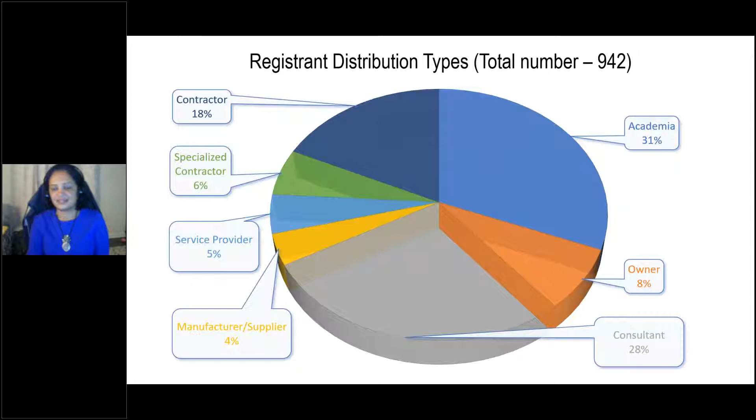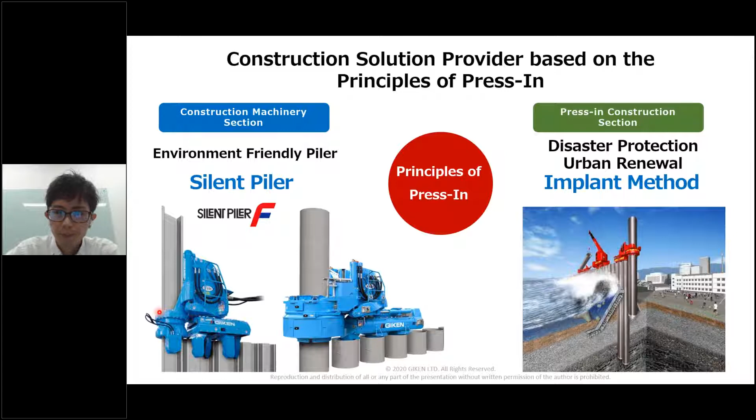Mr. Akio Kitamura, the founder of the company, was awarded the Ben Gerwick Award as the first Japanese recipient in 2017. The award was presented at IFCEE, an International Congress for Underground Development Technology, in 2017 in Florida, USA. It is an international prestigious award given by the Committee of Ocean Foundation in DFI for innovation, particularly in the ocean foundation industry.

We have several branch offices worldwide, such as in the Netherlands, Shanghai, Singapore, Sydney, and New York.

I will provide information on the principle of the press-in method and steel piling technologies. I will also present case studies that use the Silent Piler.

Mr. Ernst asked in the previous webinar if any of you have experience in steel piling or designing steel structures. Approximately 60% of you responded yes, which is good news for us. However, some of you might have never heard about Silent Piler or the name Giken.

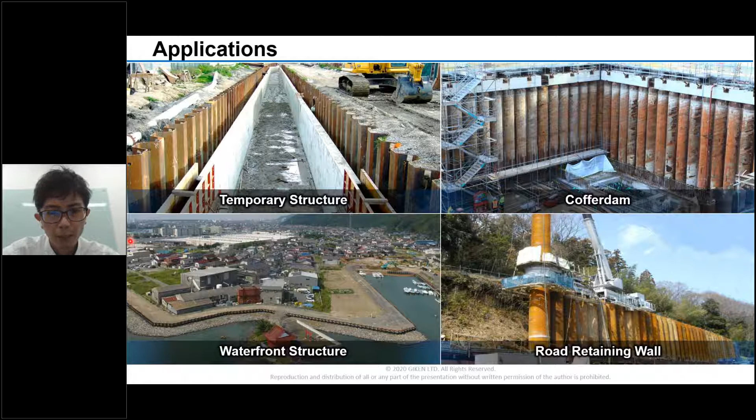Next, you will see the mechanism of the press-in method. The basis of the press-in method is very simple: Silent Piler grips the previously installed piles to obtain reaction force, which are called reaction piles. Based on the reaction piles, Silent Piler installs the sheet pile into the ground using static loading.

The sheet piles are not extracted easily because soil adheres to the sheet piles underground. From this fact, a pile driver can be integrated with the earth if the machine grips the previously driven piles. So this is a key point.

Also, it's possible to achieve extremely low noise and vibration piling if the pile can be pressed using the extraction resistance force of reaction piles.

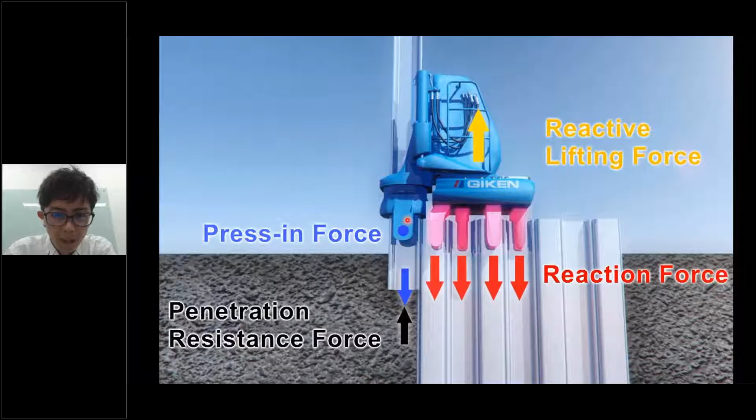The press-in method begins from a reaction stand, which includes outriggers loaded with counterweight. The counterweight provides initial reaction weight to install the first 3 to 5 piles into the ground.

After the initial piling is done, the counterweight and reaction stand are no longer necessary, so they are removed. But Silent Piler is able to continue the pressing work using only the already installed piles.

There are many types of sheet pile available worldwide, applicable for silent piling. For Z profile sheet pile, we can drive single Z profile and double Z sheet pile. We can also drive an 800 mm sheet pile, a wide range of Z profile sheet pile made by ArcelorMittal. In addition, hat-shaped sheet pile and zero-shaped sheet pile, both made by Japanese steel manufacturers, are available as well.

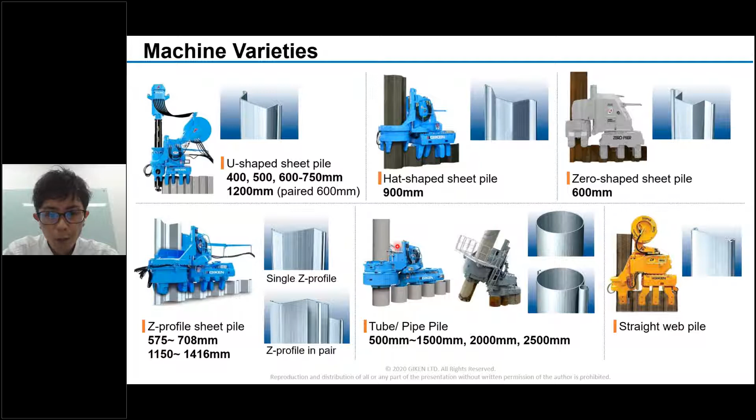Moreover, we provide tubular pile and pipe pile installation solutions. The diameters available are 500 to 1,500 millimeter, 2,000 millimeter, and 2,500 millimeter.

This shows the standard machine layout of the pressing operations. The operation comprises silent piler, a hydraulic jacking machine, power unit of silent piler as a power pack, and service crane. This picture shows what you should prepare on site as a standard.

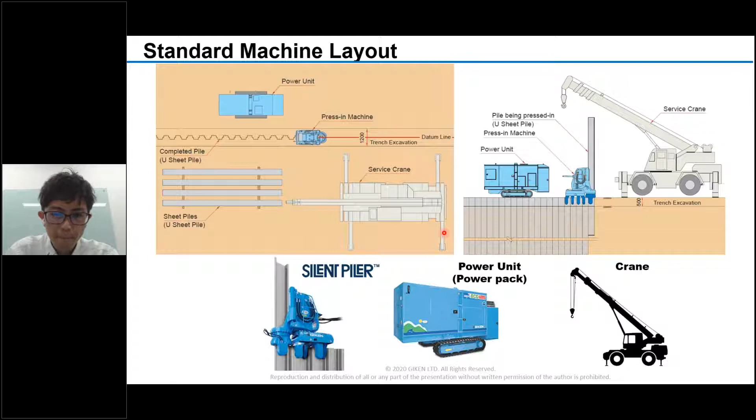The pressing method emits only minimum noise, and it is almost vibration-free. It's completely environmentally friendly. Hence, this pressing method is nuisance-free. It can be applied adjacent to residential areas and train operations.

For instance, in the UK, the acceptable noise level during construction is provided by British standard BS 5228. This figure illustrates noise levels of typical steel sheet piling methods. In urban areas, the acceptable noise level should not exceed 75 dB. In addition, the maximum noise limit in rural areas is 70 dB. As you can see, our method produces noise below the limit of British standard BS 5228.

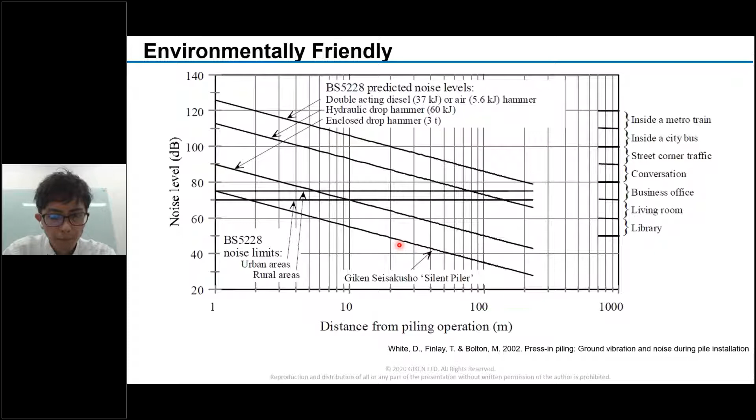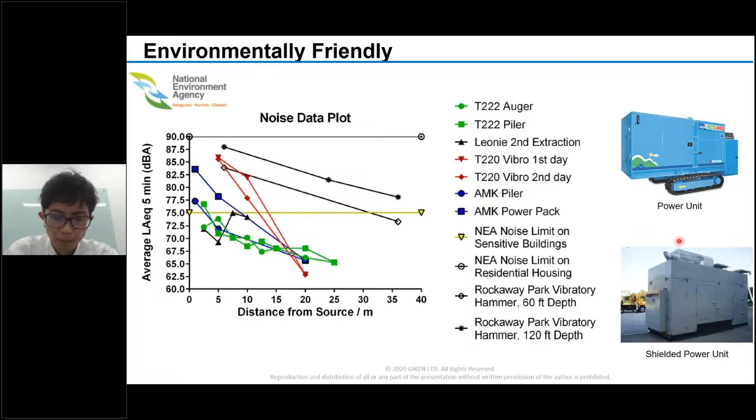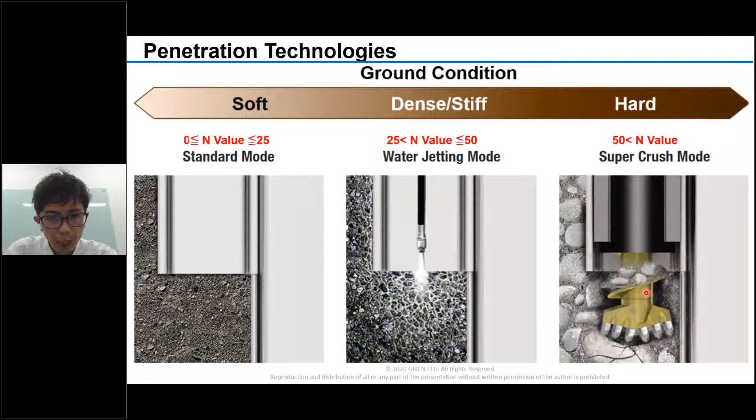As mentioned earlier, Silent Piler is available for many types of sheet piles. For single Z profile, the applicable width for Silent Piler is 575 to 708 millimeter. For double Z sheet pile, the applicable width for Silent Piler is 1,150 to 1,416 millimeter. When you consider Z profile sheet pile as a retaining wall, you don't need to consider any reduction factors.

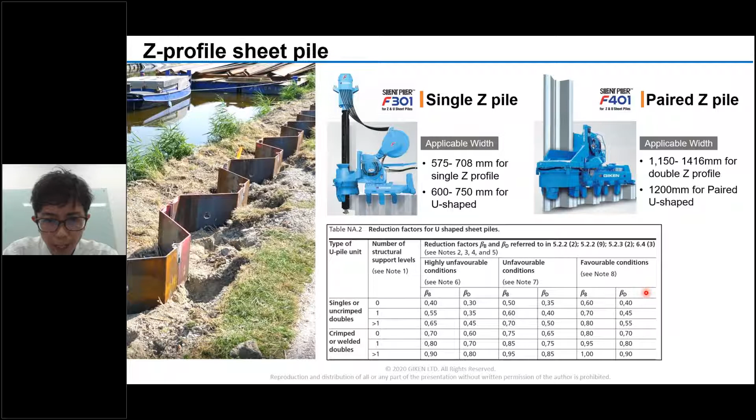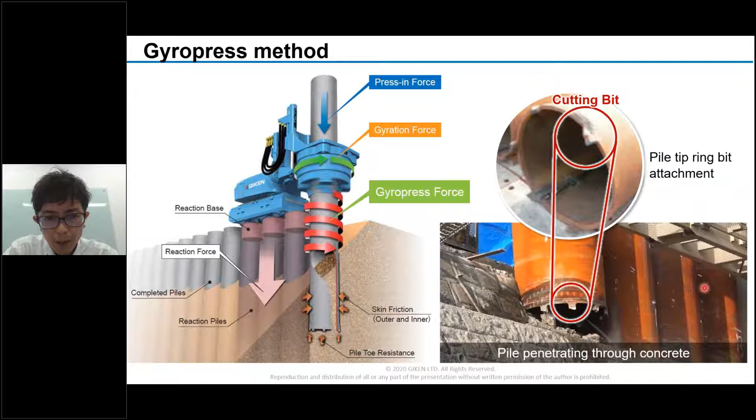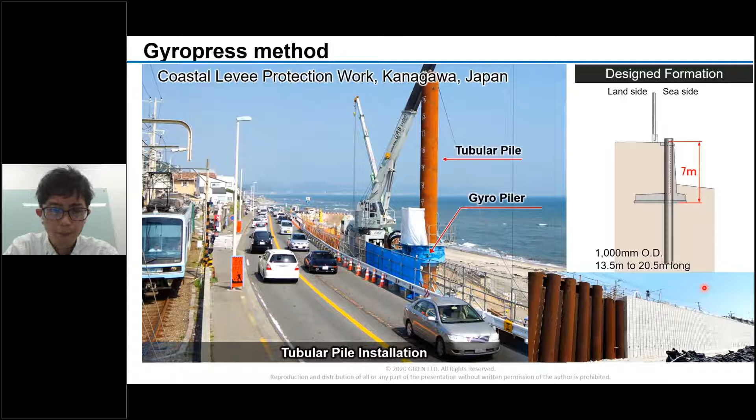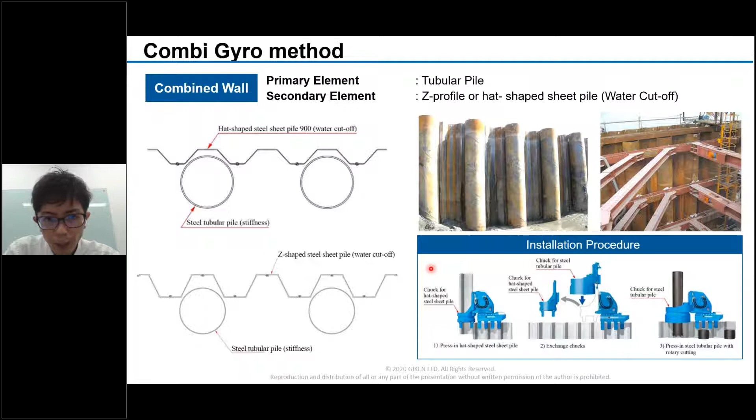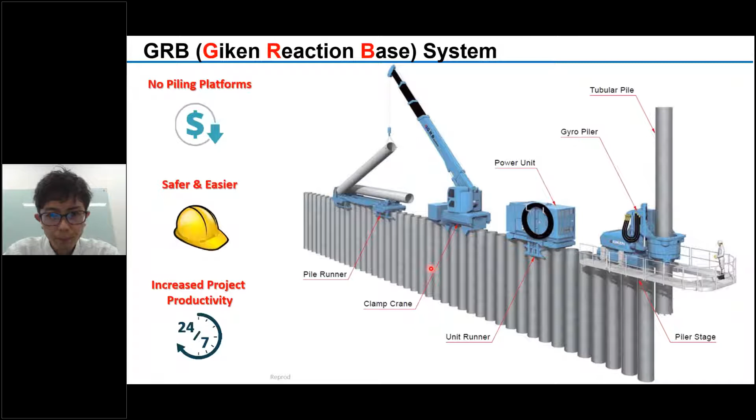Each piece of equipment stands on its own while gripping the previously installed pile. This means there is no risk of machine rollover, and construction continues as long as there is sufficient space for the machine. This footprint-free installation method substantially eliminates temporary work and significantly reduces construction cost and time.

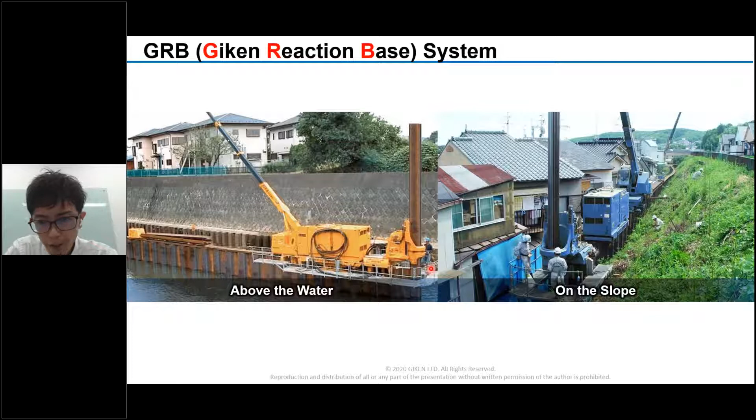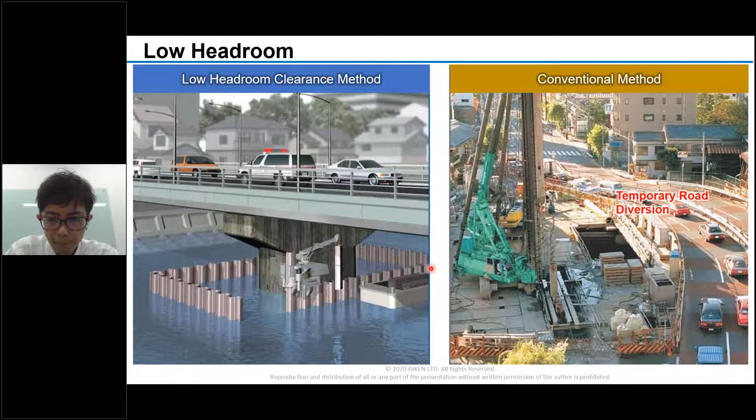So this slide shows the case studies under a low headroom. The cofferdam, as shown in the photo at the left side, was built for the bridge foundation work. After finishing the foundation work, Silent Piler extracted sheet piles even under low headroom.

For U-shaped sheet pile, Silent Piler can operate for a minimum of 2 meters under low headroom. In the photo depicted on the right side, tubular piles were installed for the bridge abutment. The minimum distance required for tubular pile operation is 4 meters.

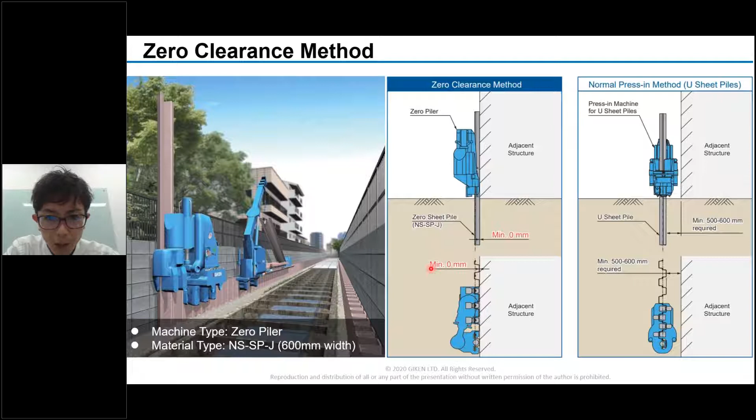As the machinery is compact, it doesn't occupy large areas, hence it's safe and there's no risk of machine rollover. So this method is beneficial for development and improvement of underground drainage spaces.

Up to this topic, I have explained the pressing principle of the pressing method and the steel piling technologies that we developed. From the next slide, I'm going to explain case studies that use Silent Piler.

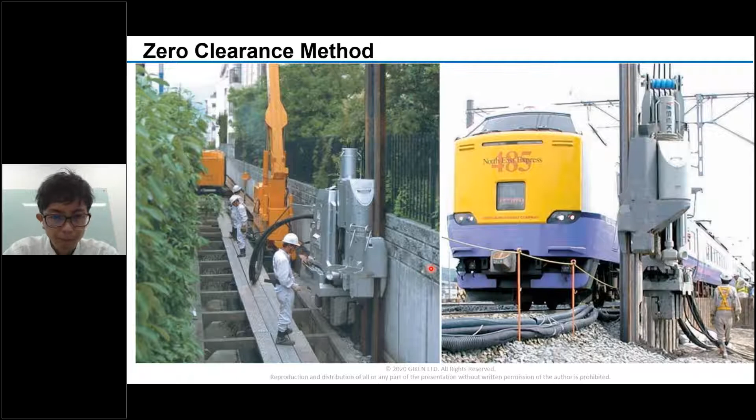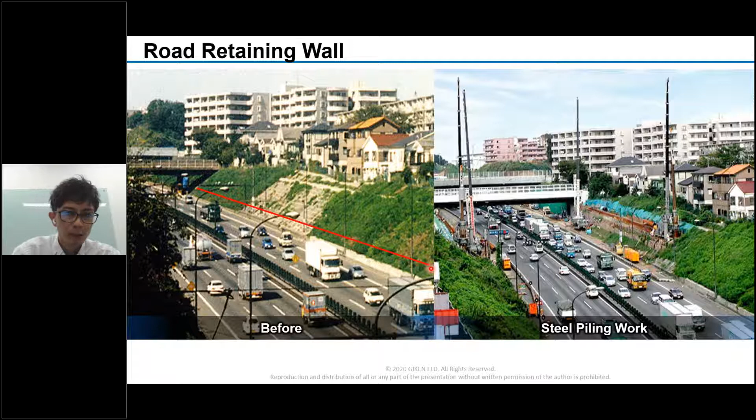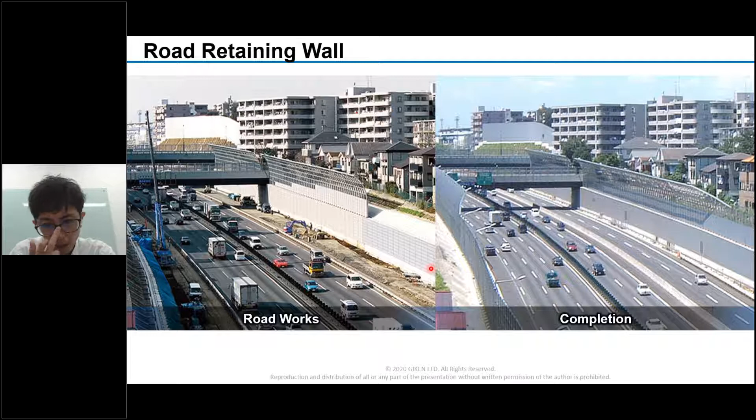In the Canary Wharf station located in London, our pressing piling rigs were applied for steel pipe installation of a pipe pile cofferdam. Innovative design and construction techniques enabled the station box to be completed 4 months ahead of the development program.

The Canary Wharf station is the first station on the Elizabeth Line and is one of the largest stations in London Railway. The station site is located on the north side of the Isle of Dogs in the London Borough of Tower Hamlets. The station box is 260 meters long and 25 to 30 meters wide.

On the first tender stage, double skin sheet pile cofferdam and new cut-off wall quay along the north quay were mentioned.

Instead of the first design, contractor proposed a design as shown in the pictures at the right, which shows Giken pipe pile wall, contiguous bored pile through Giken wall, and secant bored pile.

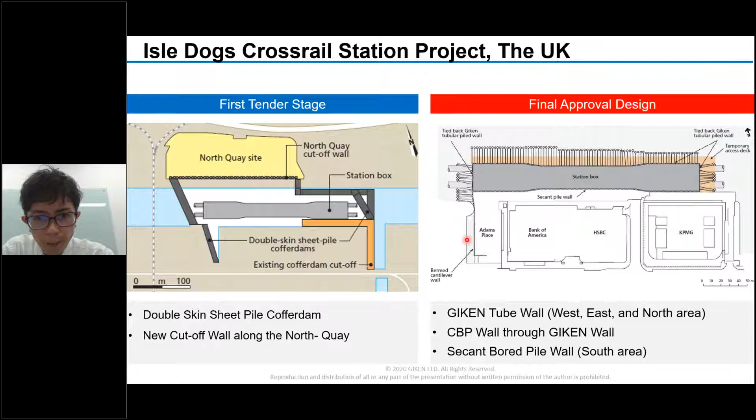The formation level of the station box is approximately 18 meters below the dock bed level, while the dock is 9 meters deep. As shown in the pile detail, 36 meter long contiguous bored piles were formed at the lower end of the pipe pile. These piles were entirely reinforced and concreted.

The east, west, and north sides of the retaining wall were built with 309 pipe piles installed above the water by utilizing the pressing piling method with super crush mode. The south side of the station box retaining wall was built with secant bored pile.

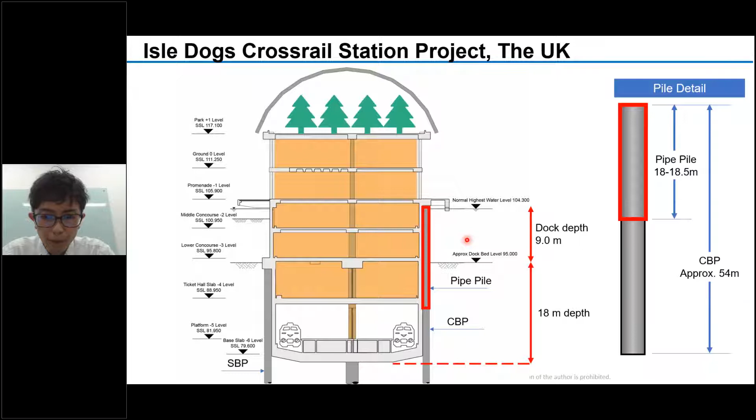There are some key issues that needed to be addressed for the project to be successful. These key client requirements were: minimize noise during piling operations, reduce the volume of excavated material to be disposed off-site, minimize the impact of ground movement on adjacent structures, design the station for long-term dock gate failure conditions, maintain the dock for ship navigation, and consider an allowance for ship impact load on the station structure.

The design scheme has been extensively described by Arup's engineers in papers.

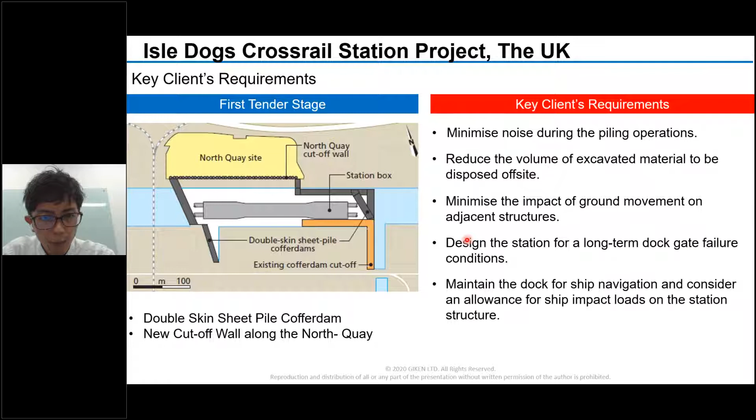Additionally, some issues were also encountered with pile installation. For instance, a cutoff to restrict the flow of water was required to allow construction of the station box. All clutches were to be fully interlocked and all corners closed. Clutch grouting was to be used on all interlocks.

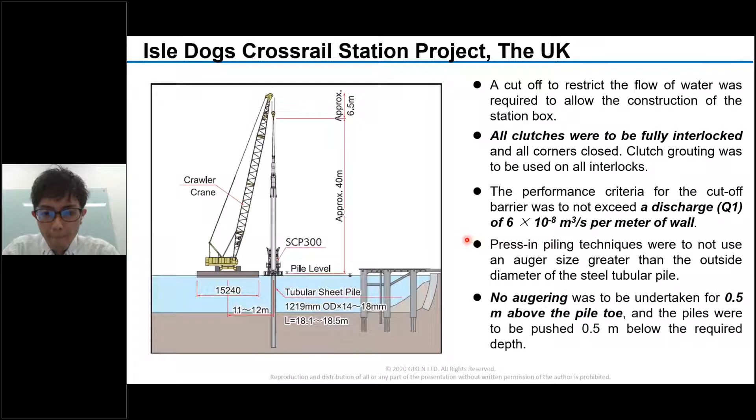Three months before the start of construction, the developer of the Canary Wharf project conducted field tests to verify if the press-in with augering method could be used for the project. Consequently, it was proven that these piles reached the Lambeth Group, and didn't have an adverse effect on the bored piles after the tubular pile installation.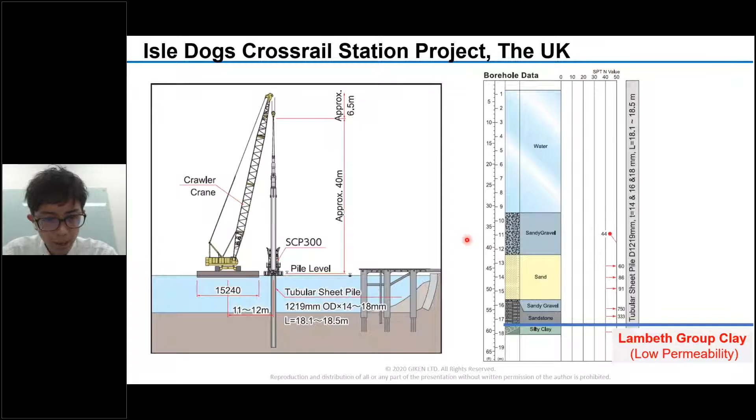The average installation productivity was 3 piles per day.

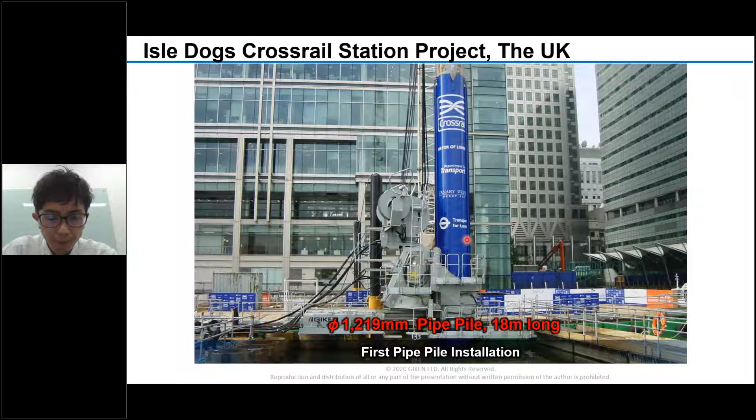In terms of wall deflection, the cofferdam swayed to the south during pre-stressing of anchor piles and draining of the dock, which was caused by dock water behind the cofferdam. In the dewatering stage, the wall deflection was only 10mm compared with a 20mm predicted value. So the pipe pile retaining wall could provide excellent water tightness.

For the railway project, the first thing we had to consider was avoiding impact on train operations. Tubular piles were installed using the gyro press method to penetrate through slope protection concrete structure without interference to train operations. The purpose of the project was making a retaining wall and a railway embankment instead of using the existing railway.

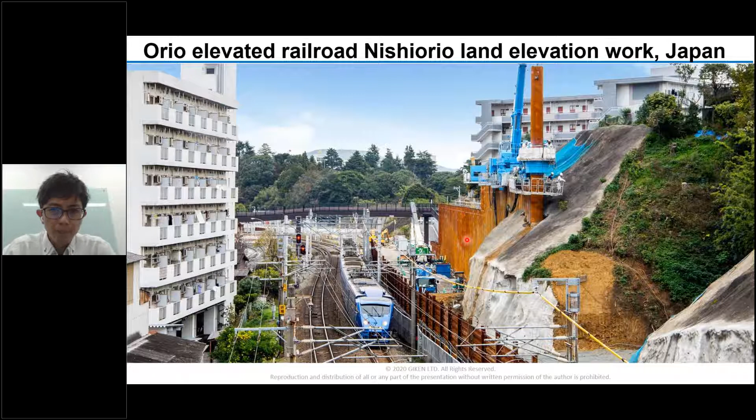We also completed a sheet pile retaining wall project near a railway in France. The client considered several impacts, such as settlement of the railway embankment during sheet pile installation with simultaneous super crush mode. In this case, we measured sheet pile wall deflection to verify that the requirement was met.

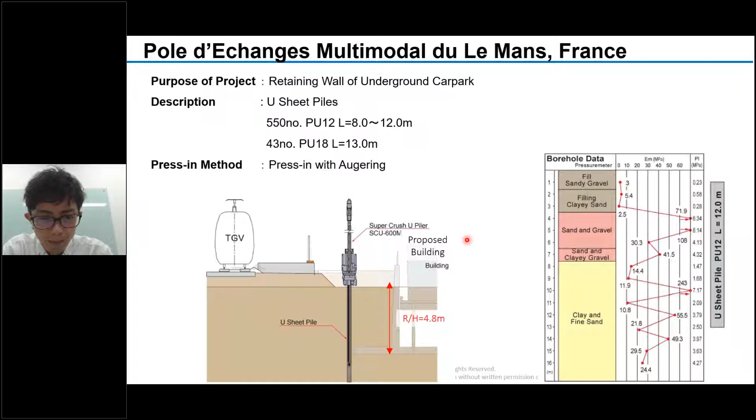This shows the site situation, where the sheet pile alignment was located 6 meters away from the boundary wall. We measured sheet pile wall deflection at 20 spots. Generally, the measured value was smaller than the assumed deflection, even after soil disturbance.

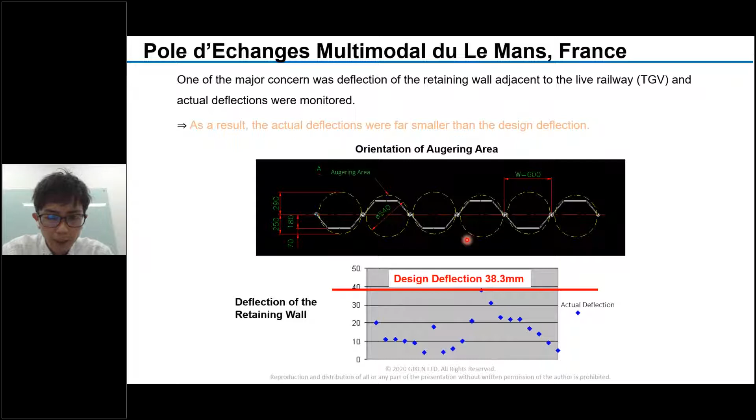Moving on to the basement wall project, St David's 2 was a £675 million mixed-use development project in the center of Cardiff, Wales. The footprint area was the size of 8 football pitches, built to create a second-level car park and retail service yard.

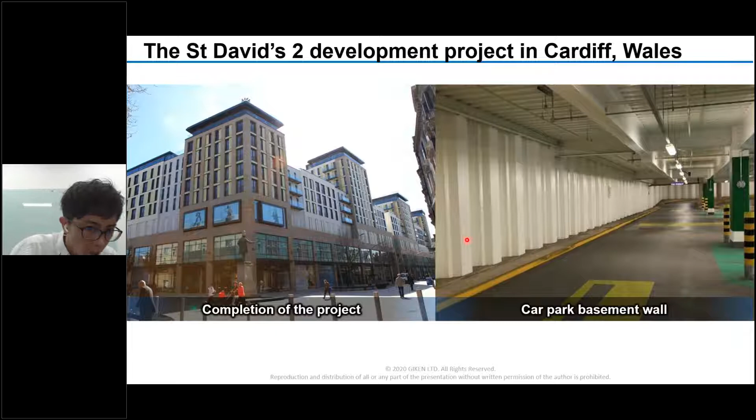U-shaped sheet pile and pipe pile walls were applied. The basement wall for U-shaped sheet pile had 1,169 pile pieces, 600mm, with PU12 anchor walls also applied.

Basement walls for the tubular pile had 205 piles, 914mm in diameter. For U-shaped sheet pile and pipe pile wall installation, our press-in piling method was applied to minimize necessary construction yard space and unacceptable vibration at the tunnel running underneath the south area of the site.

The design life of the retaining wall is 100 years. The existing building had to be removed concurrently with U-shaped sheet pile and pipe pile installation.

Although the original design was secant bored pile, due to these circumstances, we proposed our product to the client, as the press-in piling machine has a compact design, so they suit well in this kind of situation.

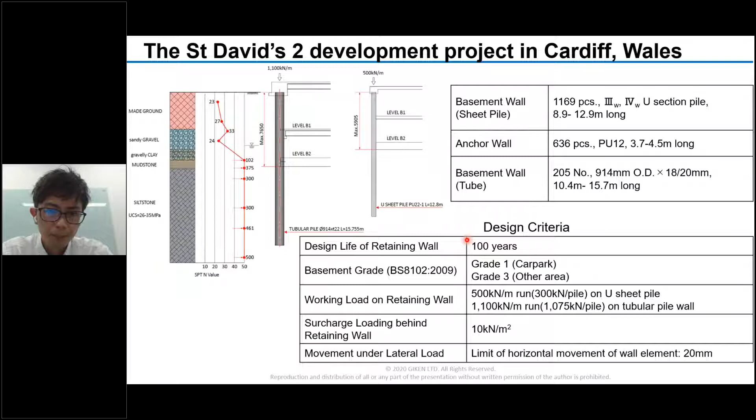Permanent steel piling is less considered for basement walls, as the interlocks are assumed to be a potential leaking point. So in building a steel piling basement wall, the sheet pile should be seal welded to provide a fully watertight wall.

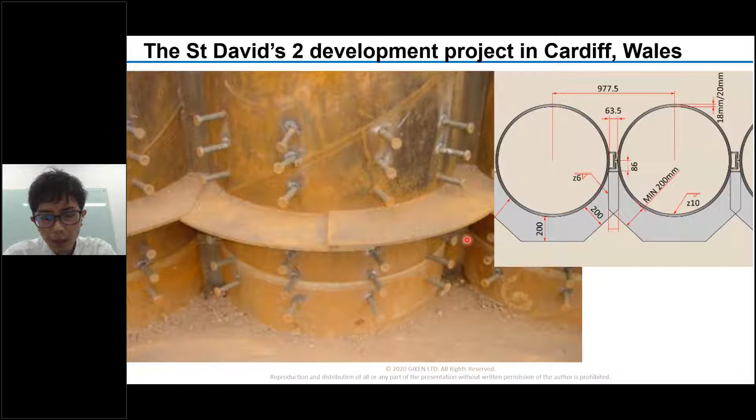This shows a watertight solution for pipe pile wall. These photos illustrate the rig for pipe pile and the U-shaped sheet pile did work and post-excavation.

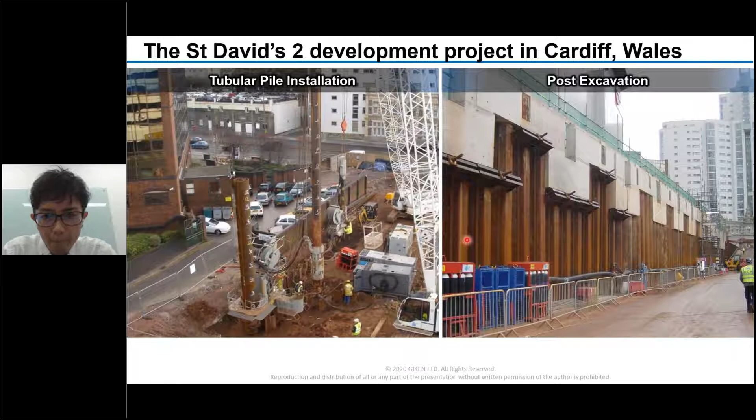If you are thinking of using a retaining wall for your basement, we could help you achieve effective land use. All steel foundation and press retaining systems, including most sheet pile walls, can be extracted and either reused or recycled. This can make the site free of obstruction and easier to redevelop.

There are many types of panel, such as concrete panel, wooden liner wall, and sometimes a coating after U-shaped sheet pile or pipe pile installation.

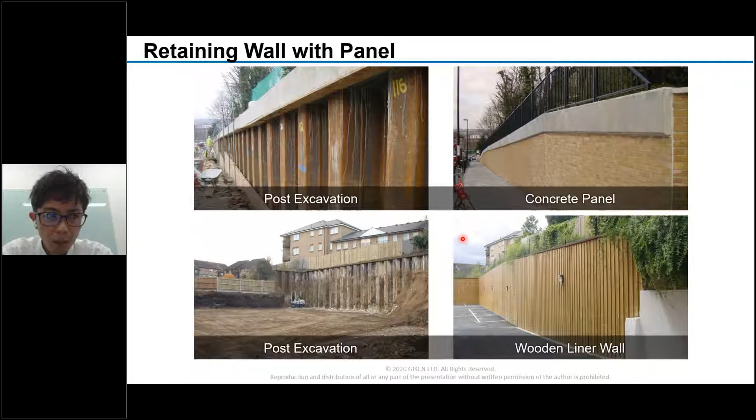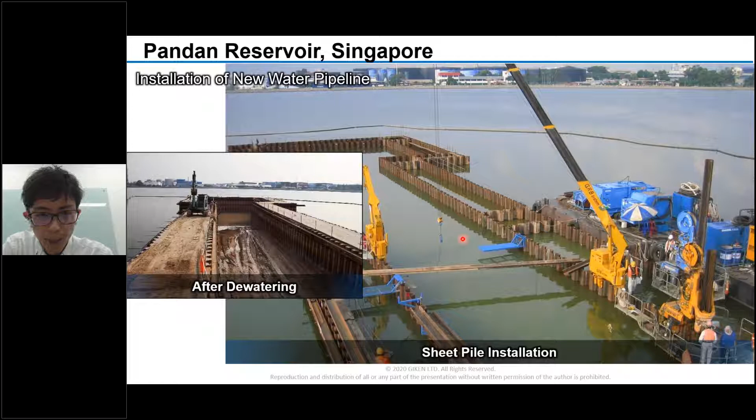This is the Pandan Reservoir in Singapore. The cofferdam was built for the water pipeline installation by utilizing sheet pile installed by pressing method with the GRB system. After dewatering, the water pipeline installation works were completed.

Flood alleviation has been increasingly necessary due to climate change. The ways to protect against floods include increasing embankment height, widening the width of the river or canal, excavating the river or canal bed, or making a retarding basin. Of course, sheet pile wall can be suitable for these types of conditions.

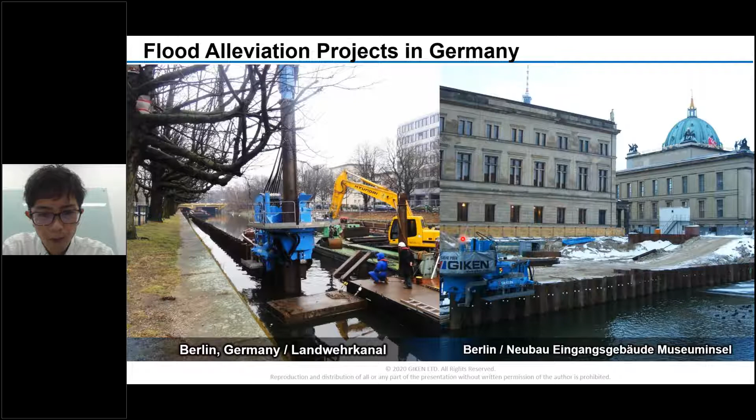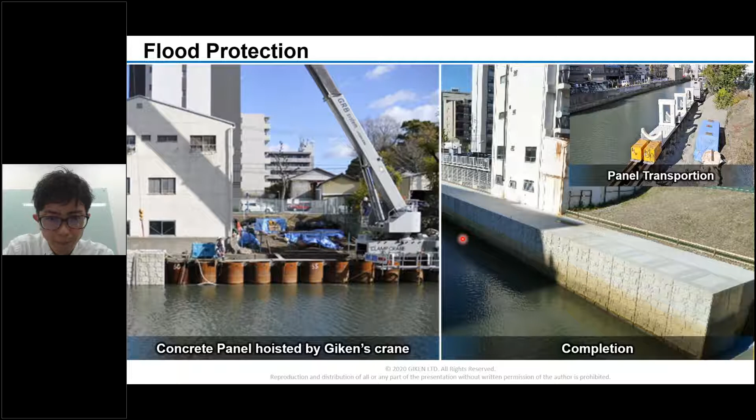This slide shows the flood protection work project in Japan. In this case, a prefabricated concrete panel was hoisted by clamp crane, which is one of the GRB system equipment, in order to save temporary platform.

GIKEN Europe was awarded first place in the Innovation Partnership Quay Walls Project, named IPK, by the City of Amsterdam in 2020. The IPK project was instigated to find the world's most innovative solution for quay wall renovation in the canals listed as World Heritage for the District of Amsterdam. GIKEN and its GCraft partners were awarded first place among 17 international parties and have entered into a partnership agreement with the Amsterdam city government.

With some of the country being below sea level, the Netherlands boasts world-best solutions for water management. This project will draw world attention. This achievement highlights GIKEN's development as a total global engineering solutions provider. If you are curious about this project I just mentioned, please check the GCraft website at www.gcraft.nu.

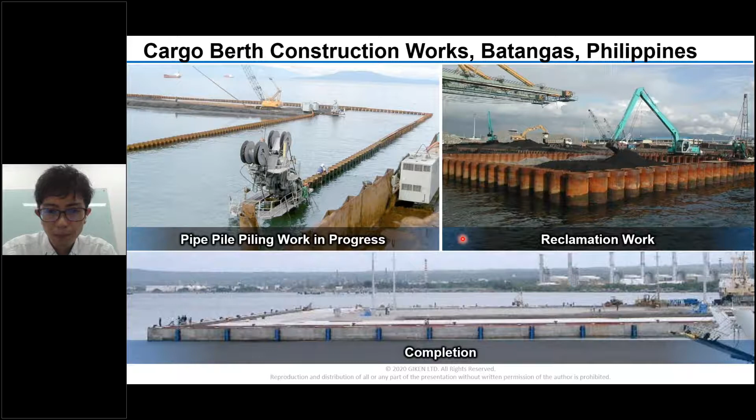Recently, there have been several natural disasters happening in Japan. These have caused extensive damage. These have also confirmed the vulnerability of the embankment.

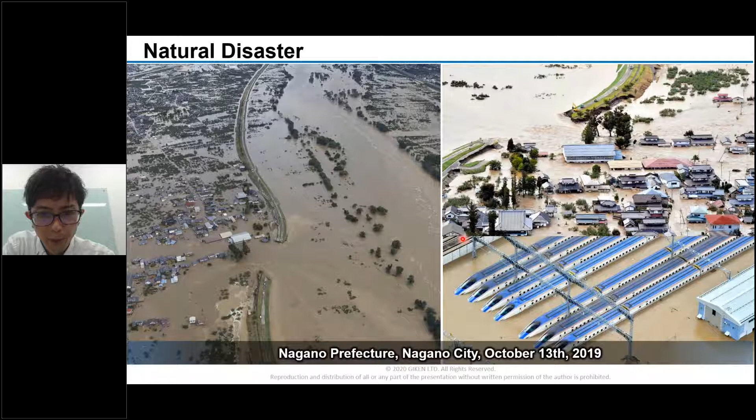So we started researching double row sheet pile wall measures against natural disaster with a university, Nippon Steel, and an engineering company. I was one of the research members. This is because a double row sheet pile cofferdam built for water gate construction in the disaster-stricken areas remained intact after a complex disaster.

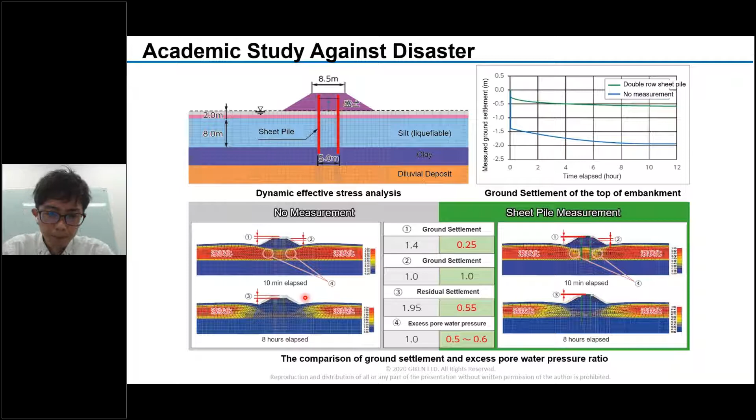From the results of this study, we have proposed a double row sheet pile wall as a countermeasure against natural disasters, including complex disasters. After an earthquake happens offshore, liquefaction can occur in areas with soft soil conditions. Then a tsunami is generated and comes to the land. Double row sheet pile wall could keep the embankment functional even during extreme disasters.

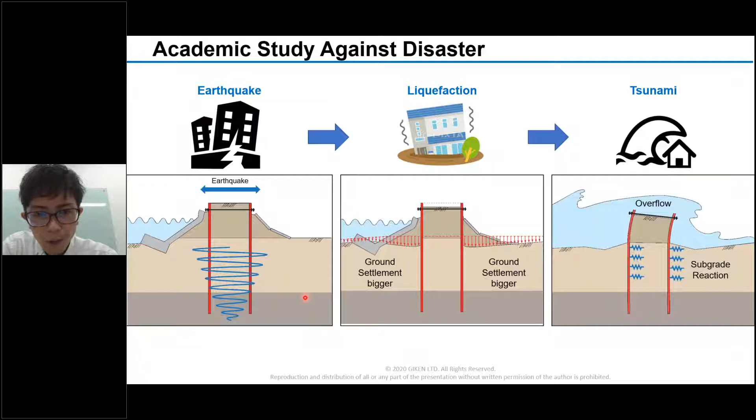Double row sheet pile wall can be used in other applications. For instance, it can be used to deliver rescue supplies and drain the water off. Or after setting up the road decking panel on the sheet pile, the road decking panel can also be used as an emergency road. If the double row sheet pile wall remains after a tsunami, it can also be used for early restoration of afflicted areas.

This slide shows the GIKEN disaster prevention system. As a pre-disaster defense, double row sheet pile wall is installed inside the embankment. After catastrophe arrives, Silent Piler builds a tentative revetment at the GIKEN wall. It's important for people and the economy not to experience a second disaster.

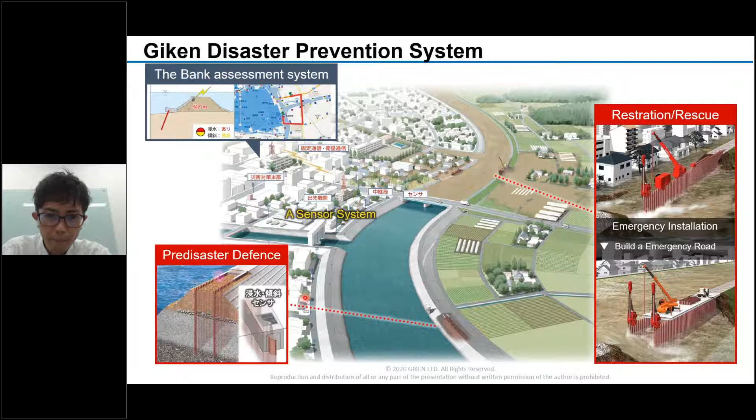We also propose a single row tubular pile wall. Of course, we have already researched about it. These are applicable when the levee widths are not wide enough, for instance those near the road.

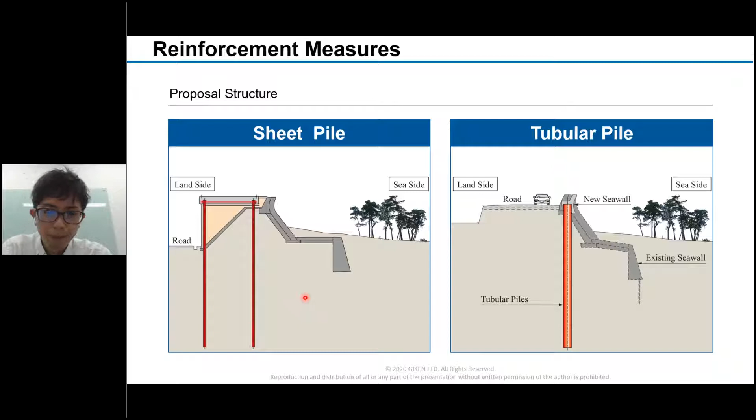This slide depicts the double row sheet pile wall built in Kochi, Japan. The total construction area of the Kochi levee where protection was required was 15 kilometers. A 4-kilometer construction length was used for the double row sheet pile wall in the 15-kilometer stretch. In the remaining 11 kilometers, the single tubular pile wall was used for the protection work, with the tubular pile installed by the Gyropress method to install the concrete structure directly.

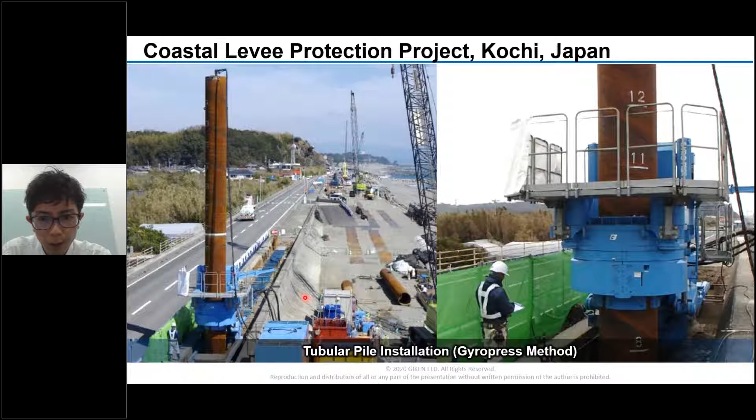In summary, Silent Piler offers minimized construction risks, and it is a useful alternative for urban development where limited low headroom, a narrow yard, and piling-induced noise and vibration are major concerns.

That was my presentation. I hope it was informative and will help you figure out where and under which situation Silent Piler should be applied. If your site has no limitation or concerns, the hammer or vibration method should be used. So I hope my presentation helped you understand the additional values and advantages of Silent Piler.

My origin is somewhere in the depths of the earth, and my story began billions of years ago, when I was born in a blaze of fire. I helped you survive through the ages. I've changed the way you work, and I've changed the way you live. I've been part of mankind's greatest achievements. I allowed you to expand your frontiers, to explore the land, the water, the skies, and even the universe. Throughout the centuries, I was reborn again and again. I'm known for stability and strength. My quantity is measured in millions of tons, but my quality is defined in millionths of an inch. I've stretched the possibilities of human imagination. I've inspired you to shape your visions and reach new heights. Once I'm back to where I came from, I can become virtually anything you can imagine. I am more versatile than I have ever been before. I'm always with you. I'll protect you and guide you. I'm all around the globe, wherever you go. I'm everywhere and will always be. I am the engine of innovation. I am the pulse of the modern world. And you'll build your future on me, because I am steel, the fabric of life.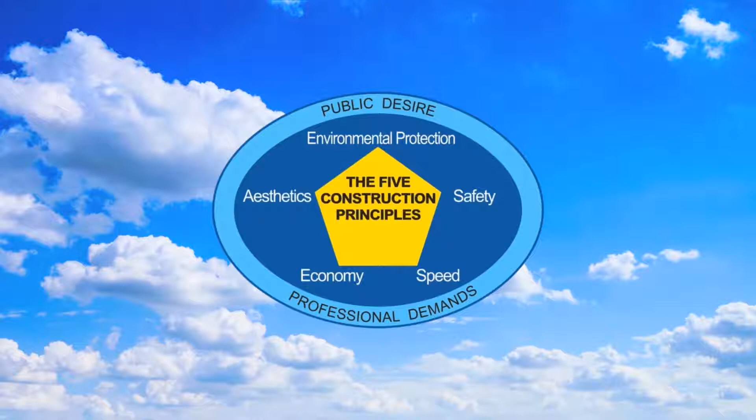The social foundation to support a civilized society. A standard which satisfies everyone is necessary for establishing the foundation. Environmental protection, safety, speed, economy, and aesthetics. All of these 5 conditions related to construction should be fulfilled in a well-balanced manner to achieve a regular pentagon shape. These are the 5 construction principles, the standard which defines ideal construction. That is the Silent Piler.

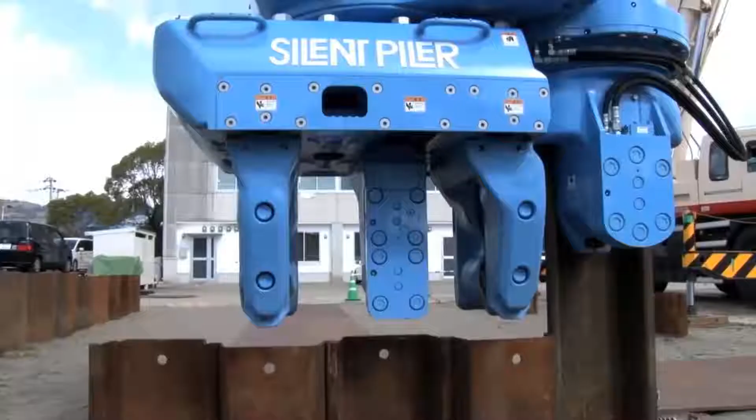Characteristics of the silent piler are as follows. The machine holds piles which have been driven in already. Through this principle, piling is achieved through press-in, which is light, compact, and quiet.

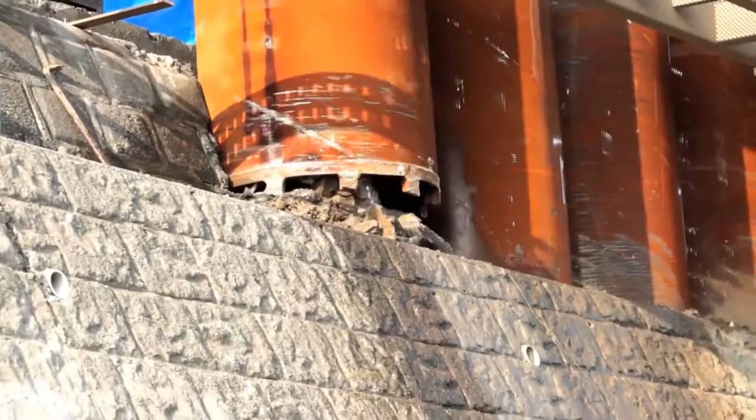We also developed our own construction technologies for piling on hard ground, concrete structures, and other surfaces. We have dramatically expanded the scope of application of press-in.

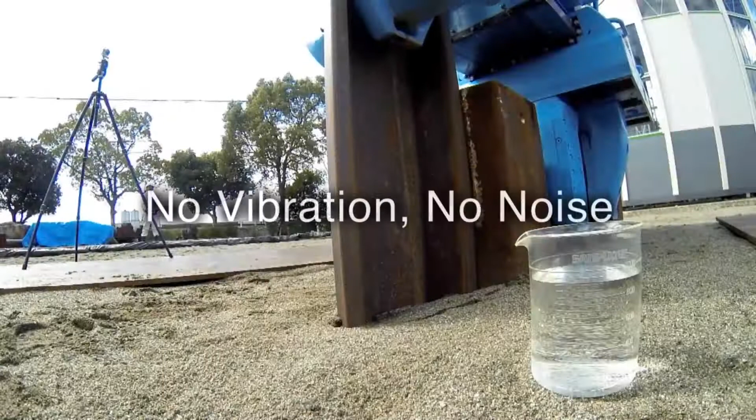No vibration, no noise, temporary work-free construction that is not wasteful, functionally strong and robust, a total package product backed up by science. The implant method, based on the superiority of the press-in principle, has made construction work possible now that wasn't possible in the past.

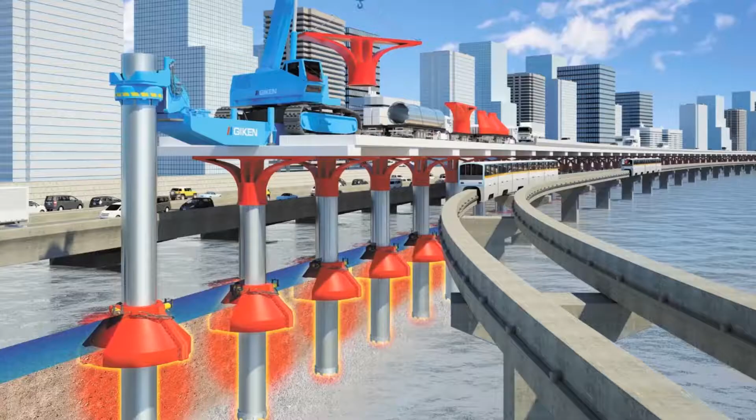As a construction method that is safe and contributes to a flourishing society, we have a wealth of successful experience globally in more than 30 countries. In order to realize our vision for construction going forward, we will follow the 5 major principles and continue to progress towards changing construction globally through a revolution in construction methods.